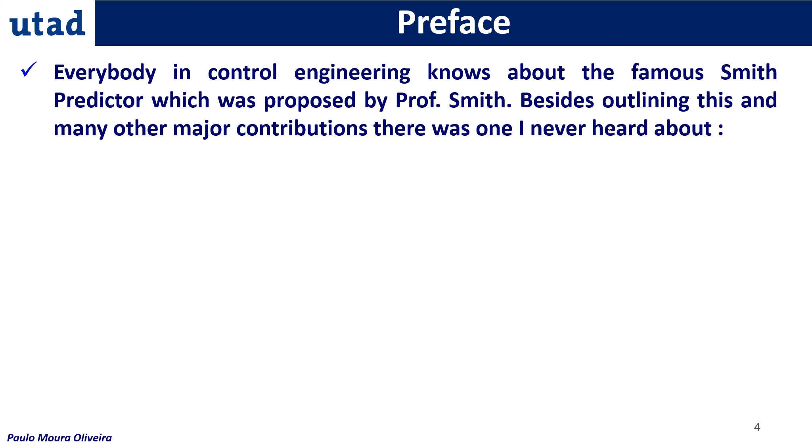I was reading an obituary about the great professor Otto Smith. Everybody knows about the Smith predictor. But besides the Smith predictor and other techniques, there was one that I never heard about, and this is Posicast Control. In this link, you can see this paragraph in a lecture about Posicast Control, and it has a very interesting explanation about the tabletop demonstration that was done by Professor Smith.

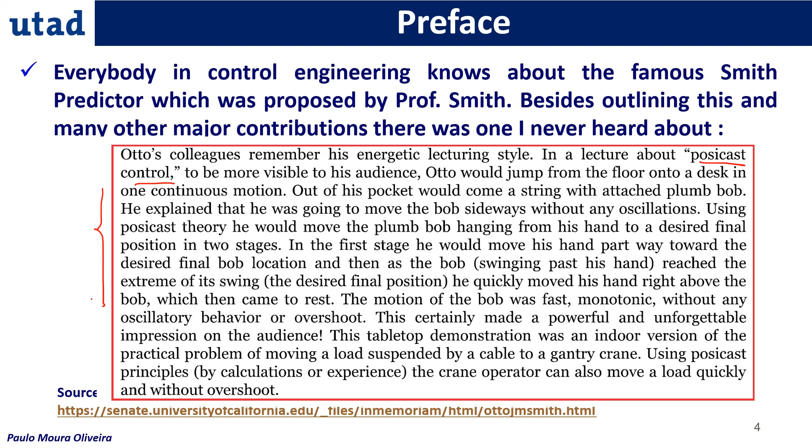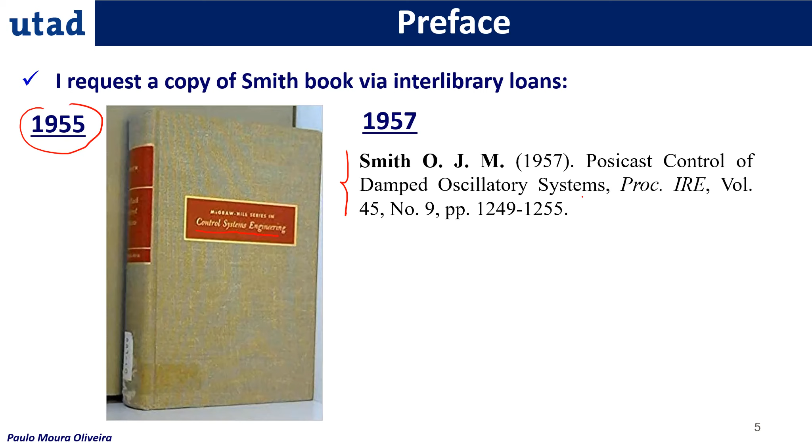With this, I began to search for information about Posicast Control. I requested a copy of his book via Interlibrary Loan. This was a book from 1955, Control Systems Engineering, and it has at least one chapter about Posicast Control. Then I also read the paper from 1957, Posicast Control of Damped Oscillatory Systems. This is very interesting as well. So based on these two and others that I searched, I began my learning process about Posicast control that I will explain to you.

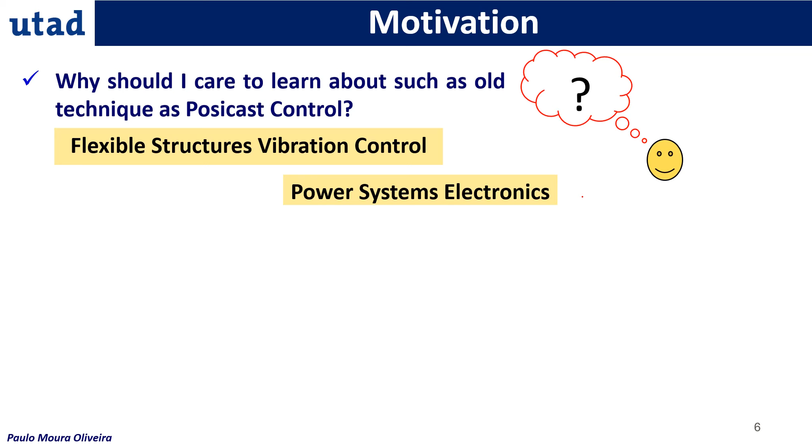You may now be asking, why should I care to learn about such an old technique as Posicast Control? The answer I'm going to give you is partial, because in flexible structures and vibration control, the modern techniques were originally based on Posicast Control. Power electronics has a lot of applications of this type of control. Crane control also has applications, so we can say that the Posicast control principle led to the development of flexible systems and vibration control theory over the last decades.

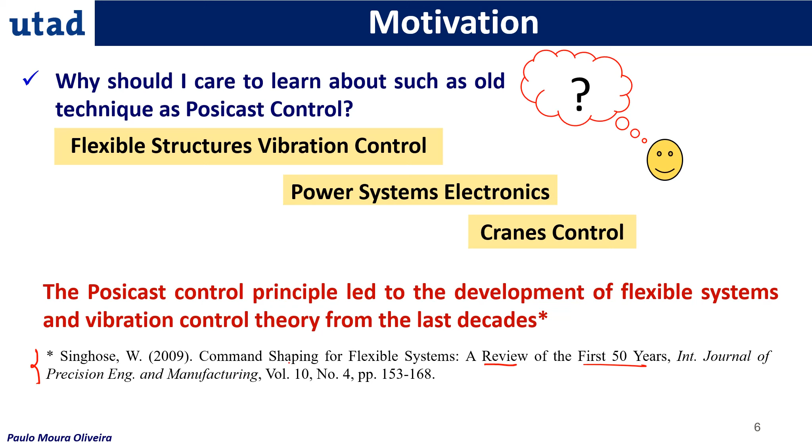If you want to search, this is one reference that makes a review of 50 years of command shaping for flexible systems, and it has a reference, of course, to Posicast control.

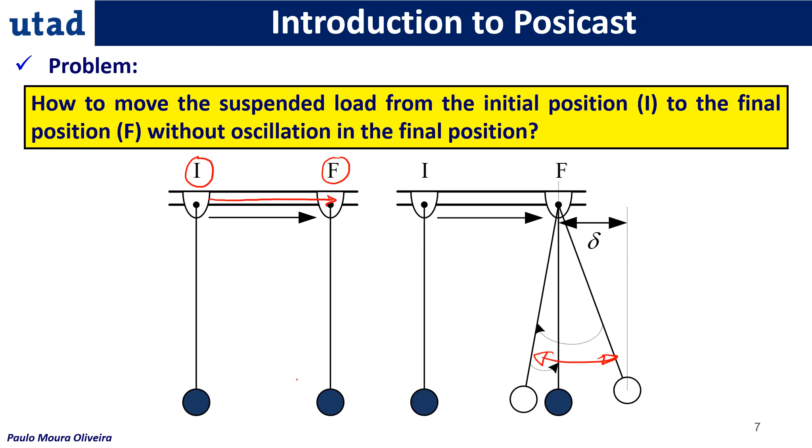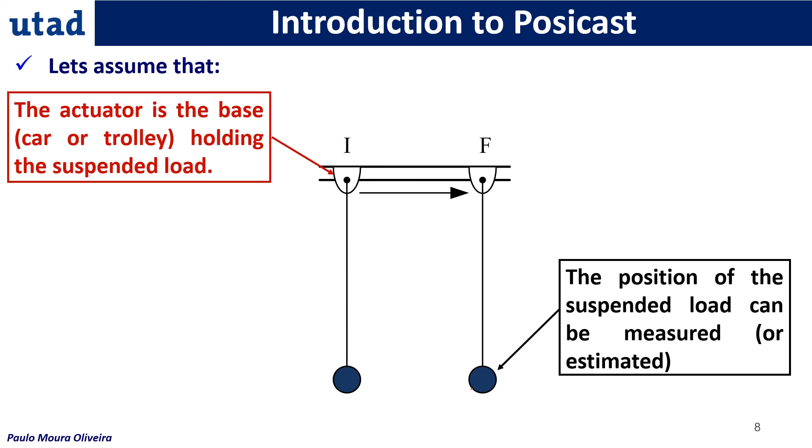Assuming that we are going to actuate this trolley, which is holding the load, and we can somehow measure or estimate the position of the load. Assume now that we are in open loop, so we don't have feedback at all. We have the system, this trolley with the load, the input signal, and the output signal.

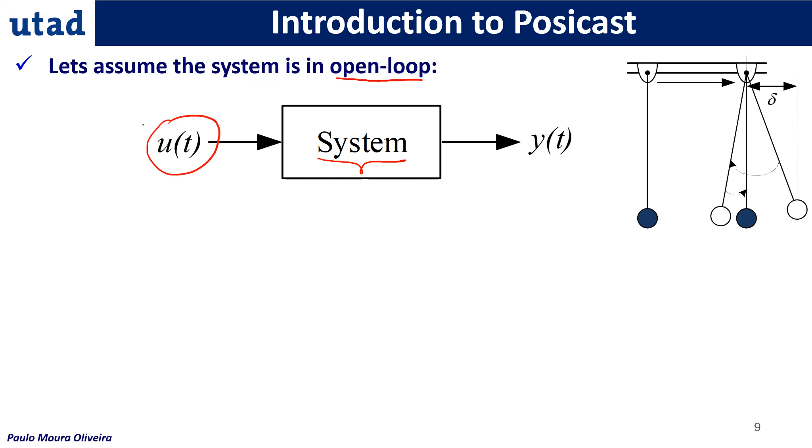It is obvious that this system can be represented by second-order dynamics. I'm not going to go into details about the mathematics in this video, but I'll show you in the next one. The movement of the suspended load in the plane, we are just going to consider a plane, is damped by the air, and of course there is also friction at this point.

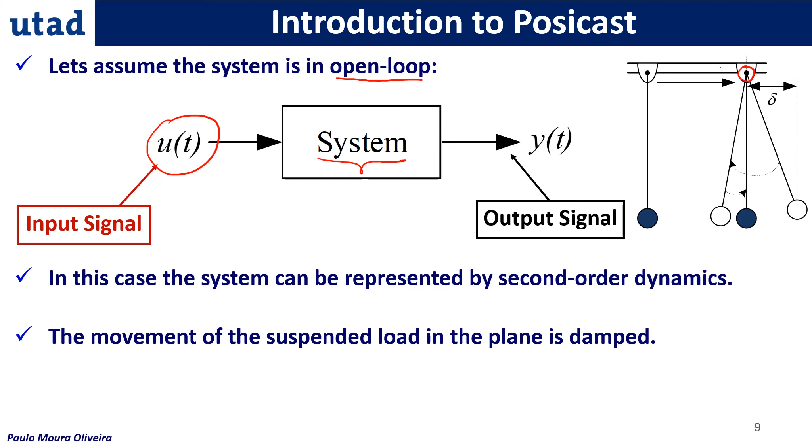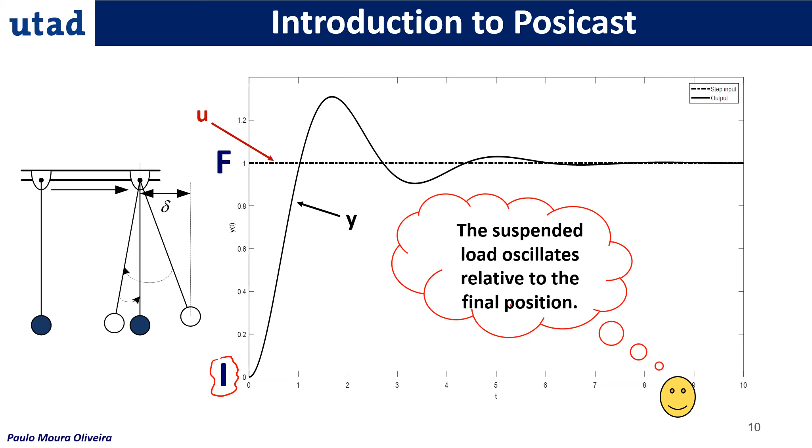What happens if you plot the position in the plane of the suspended ball, considering this is the initial position and assuming a movement of 1 meter to the final position? We have this oscillatory behavior that you can see here. The suspended load oscillates relative to the final position. That's what we don't want. With the Posicast technique, we try to avoid this.

So the brilliant idea that Smith had, I don't know where he got the idea, but from what I read, it seems that he was fishing, and the movement of throwing the line for fishing, maybe it's a Posicast, and so the movement can be represented in sequential steps, in 3 steps.

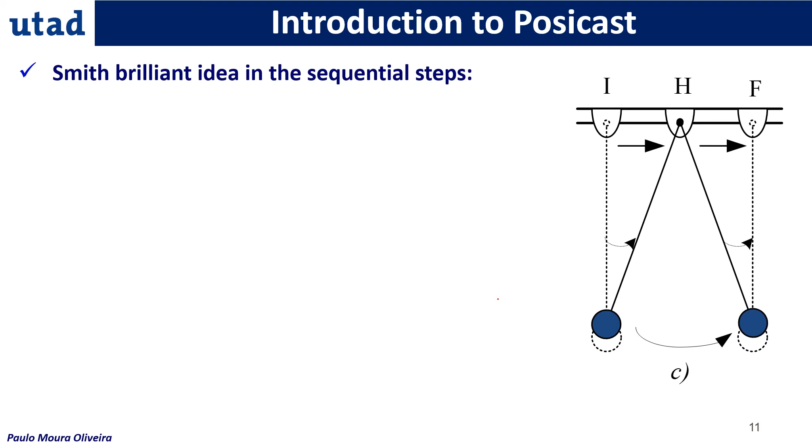So first, we have to move the base trolley from the initial position I to an intermediate position H, and stop there. So we have to move from this point to this point and stop here, and then give time so the suspended load can oscillate from this initial position to the final position.

So we have to wait here until this swing is over, and when the load reaches the final position, then move the trolley from the intermediate position to the final position as fast as possible. And if this is done well, we don't have any oscillation in the final position. So this is a brilliant idea.

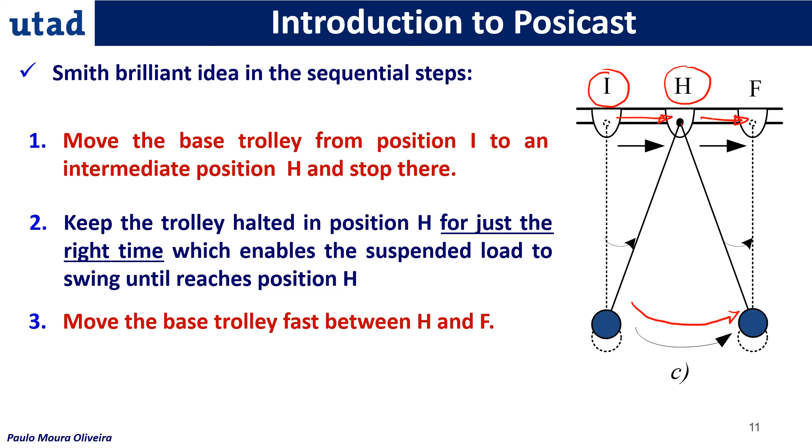And of course, in terms of the signal applied to the system, instead of applying a step, because this change of the position is represented by a step, the step here has an amplitude of 1, can be 1 meter. We have to use 2 steps. The first step, we are going to represent the amplitude by A1, and the second one by A2. And of course, A1 plus A2 is equal to 1.

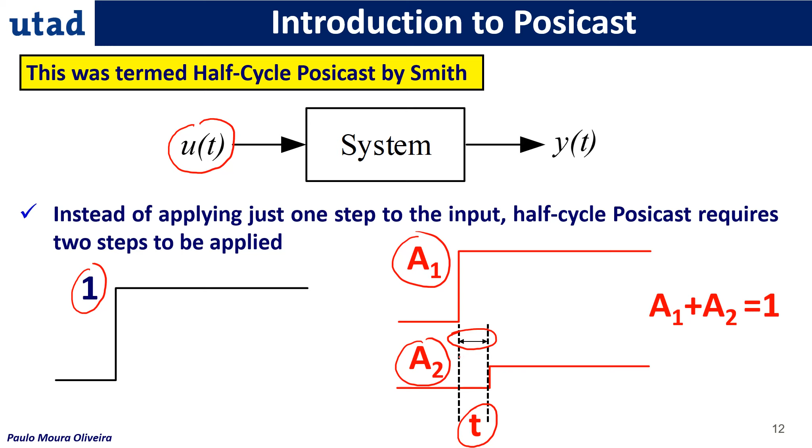And for A2, we have to wait a little bit to apply the second step. This is the time that you have to wait. I'm going to explain this time later on in the second video. So if that is done, we apply first A1, which is a part of the step, and then A2, the second part of the step. Then we are going to have a kind of deadbeat response.

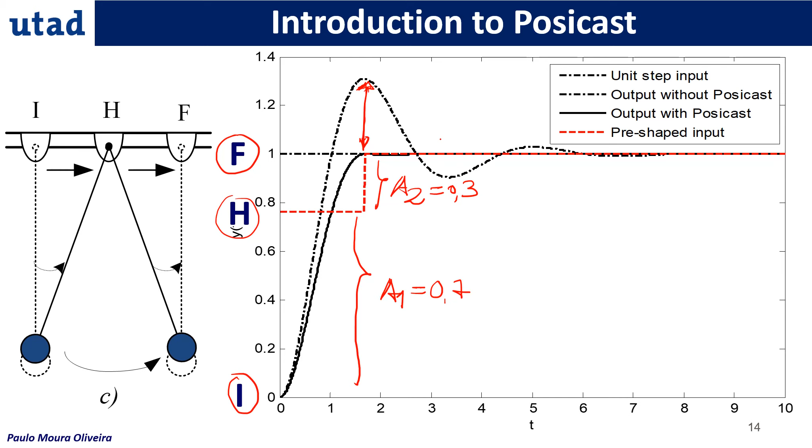And we can see here the result. As you may know, this is called the overshoot. Here we don't have overshoot. It's a damped response, deadbeat response, and this is the result that you are going to obtain.

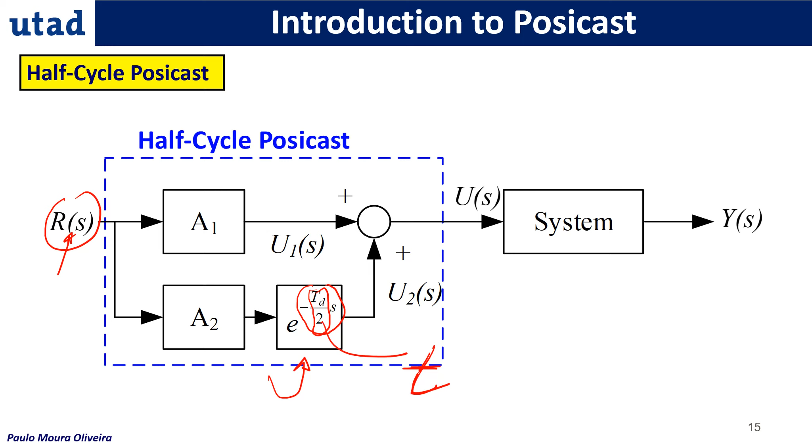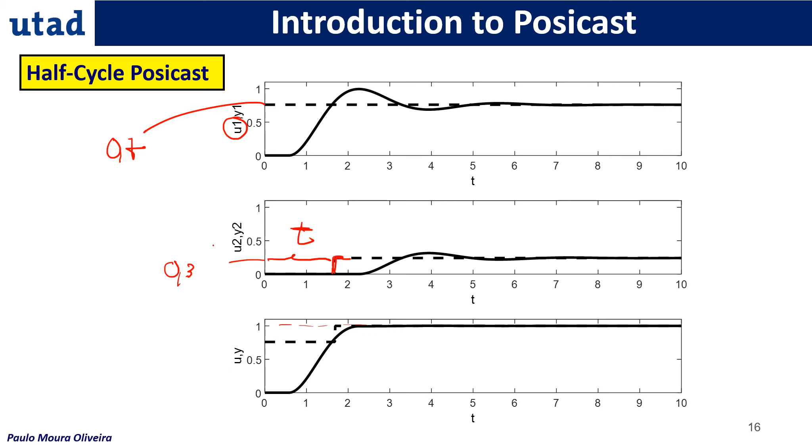So also we can see here the three components. This is the first step, the value is more or less 0.7, and we got a part of the response, and then delayed by this time t, the delay time, we got the second step, which is more or less 0.3, and we got the deadbeat response, the final response. And adding this signal to that signal, we got this dashed one over there.